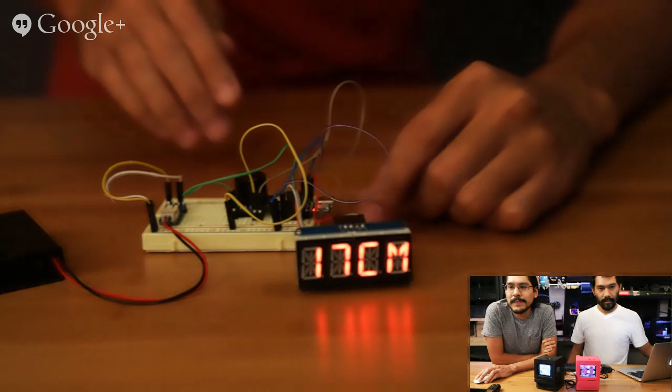This week we're working on some electronics for a future episode. This is a remix of a Trinket project from Mike Barela, done in collaboration with Becky Stern, who helped us debug some of the sensors. It's an EZ4 distance sensor, and it basically writes the distance in centimeters using our alphanumeric LED display. Here we're just testing the distance sensing, and we're going to add this to a very cool enclosure.

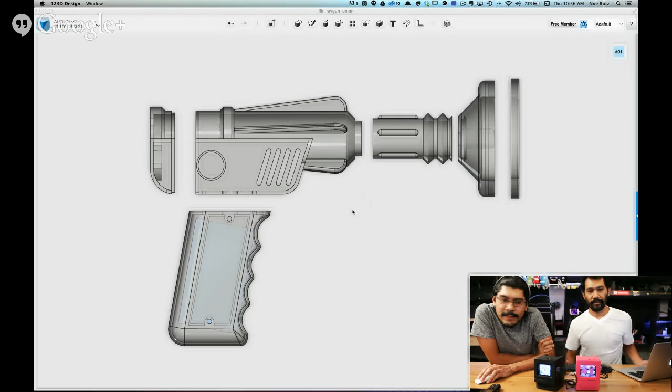This seems to be a good combination of something useful and something really fun. If you guys have seen this before, this is a previous project we worked on, a FLIR ray gun basically. This is one of my favorites that you guys have designed. It's a really nice one. What's cool about this project is we can reuse some of the components and the measurements and start on a different type of enclosure. In this case, I'm going to try something a little bit different.

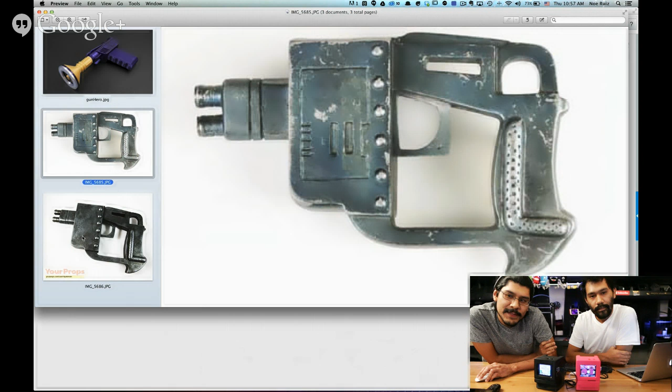If any Dune fans are out there, you might remember this. This is a pistol from Dune, and if you look at the shape, it's the perfect shape for the battery, that giant square thing in the front. It's got that giant nozzle, which is perfect for the barrel, and that's perfect for the distance sensor. It is rather large, so that's sort of what we're going to do. The next step is always to move our circuit off the breadboard, and that's what we're going to do.

Do you think you guys will have time to play around with the sound, the voice element of that, or probably not? We're probably going to stick to just the enclosure and making the little LED display show the right distance. And then that's going to be a lot of fun.

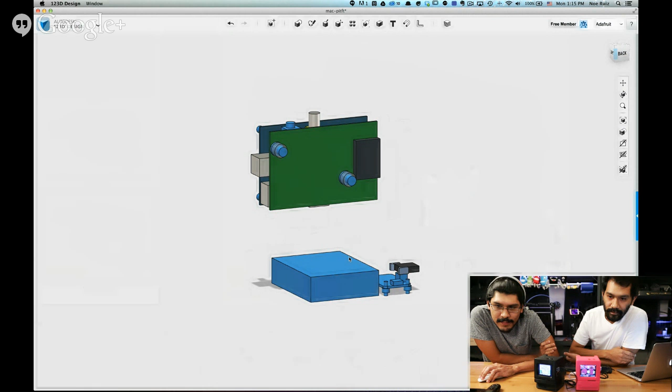Some stuff that Pedro is working on. We have a 49-hour print that just finished, so we're going to do something I don't think I've seen live on the internet before. We're going to pop off a live giant helmet off of a printing plate. Hopefully it doesn't fall apart into millions of pieces.

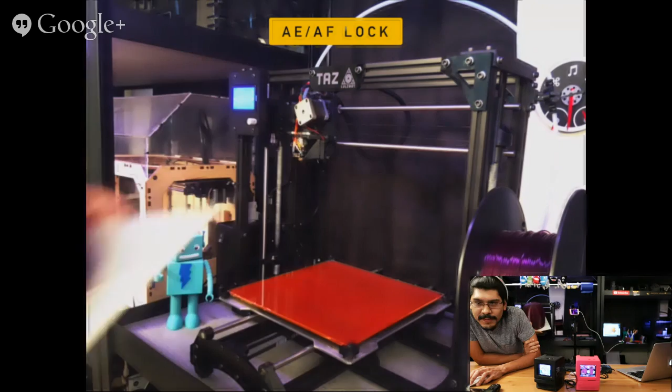All right, so you're popping it off. Whoa, okay, so you're taking the bed off the printer. That's new. Yeah, so we're going to have this in the shop in about a month or so. It's a little flexible plate here, which is great for when you might need a large print.

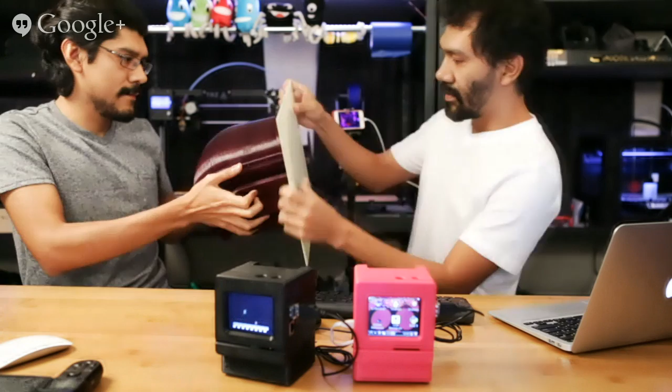You don't need a large amount of sticky tape, or this would be such a pain to get off the print bed by itself. Go ahead and hold that. We'll go ahead and... oh my God, that is so easy. Oh, fantastic! Are there any marks on the bed, or is it totally clean and ready to go?

This is the skirt, but other than that it's good. How much flex does it have? Can you bend it all the way? Pretty cool. This is really flexible, and this is like the fourth helmet we printed on there, so it's maintaining its shape. There's no warp in it, and of course we're using PLA, so there's no heated bed required, but it can go up to like 100C, maybe 110.

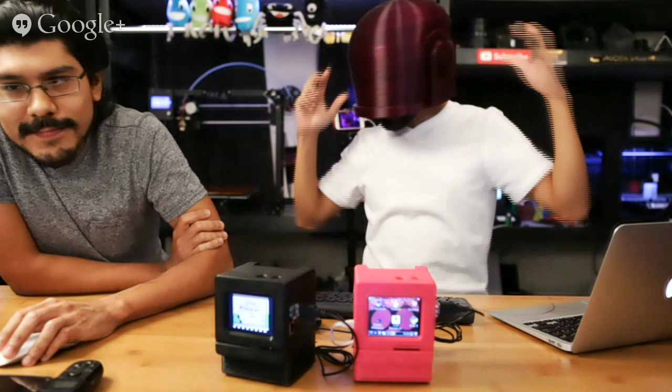We'll have these in the shop really soon, and you'll be seeing this, I think, next week. Next week it's on. That project, I'm already excited to talk about it. I'm trying to bite my tongue.

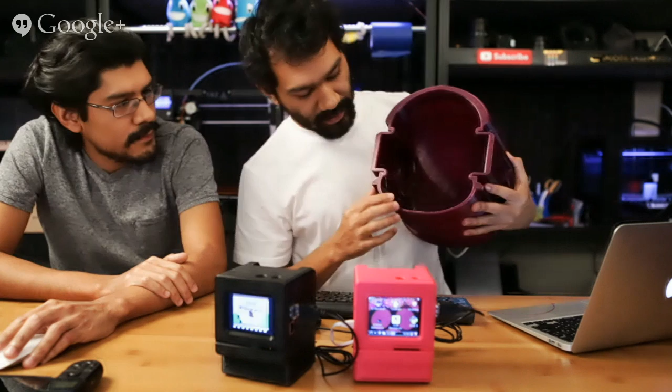So in the bottom of the base of the print, is it nice and smooth? Let's check that out. You have a couple chamfers on the edges so it doesn't scrape you or cut you. Yeah, this is all nicely smoothed out. That's all in the model though.

One of the things that I've been doing for the last day is I just got in the mail my Matter and Form 3D scanner. It's a project that had been a Kickstarter I backed a long time ago. They just finished. I'm very excited because I want to play around with some scanning possibilities.

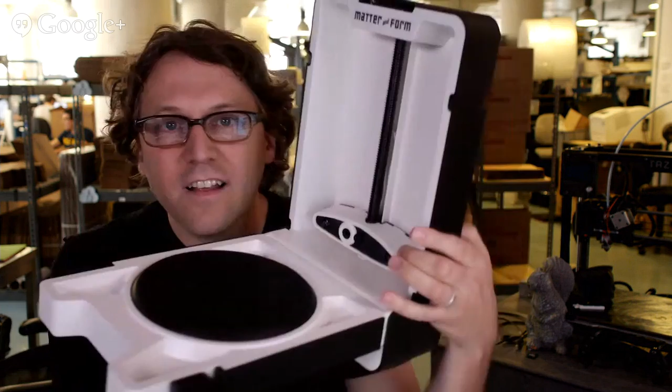So here's this cute... oh cool! It's called a turntable. Yeah, it looks very much like a turntable. It's very light, it packs up very easily. Comes with its little calibration. The case is a design, that's really cool, you can stuff the power supply in it. It's really very portable. So I'm intending to take advantage of it and set it up in a couple of different contexts and see what it's like.

Maybe scan a couple of the pick and place machines and let people download them. Very small parts at a time. This type of scanner is designed for scanning small objects. We've had 3D scanners in the store here before. We had the MakerBot Digitizer, which is a lot bigger and bulkier, and it was an earlier take on how to do this sort of thing. But this one is designed to be more higher resolution for smaller objects, and I'm going to play around with that and see what I can do with things like trying to scan electronics, that kind of thing. Find some speed tips for making enclosures in a very different way than the CAD approaches we've been doing.

Yeah, that's excellent, that's awesome. We're really looking forward to see what we come up with.

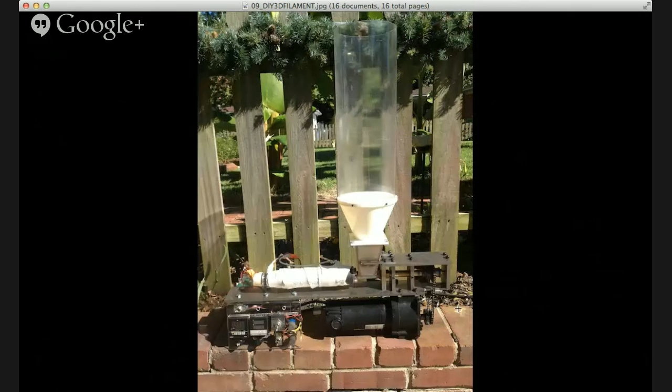This is Russ sharing on the Adafruit forums about his own heavily modded Lyman's filament extruder. Go check out this piece on the Adafruit blog, and you'll be linked to his site where he's done about 15 or so video documentation stages that show a lot of his thinking, his modifications, and some really neat experiments trying to make this practical, including a conclusion video at the end where he's saying, okay, this is sort of working, I'm making filament pretty good, and here's what's next.

Yeah, it's neat to see that people are seeing what we're sharing about and sharing back. Hopefully we'll share some future progress on that project.

Very cool. Yeah, so the project this week will be shared quite shortly, right after this. We've been collecting a couple of these little miniatures and figurines from the Macintosh, Linux, and let's see which one, I think I have both. I have Android and Linux in here.

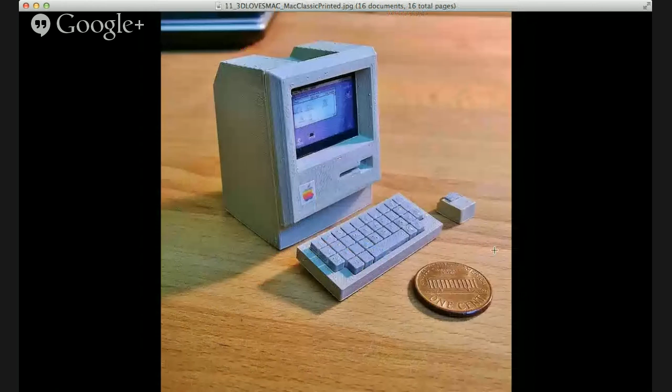So I wanted to highlight this designer who shared, via Robot Engineering, a number of really great miniatures from throughout personal computing and game console history. He did this classic Mac, and also an Apple II, a Commodore 64, an Atari, and an NES. From the very beginning of online repositories like Thingiverse, YouMagine, 3D Warehouse, etc., people would share the stuff they really loved and the stuff that inspired them. So it was fun to share a couple of these neat projects.

Those are so cute. I love how much time was spent on getting all the little details right, the colors and all the little fixtures and shapes. Yeah, it makes it really hard to do miniatures well. It really is.

So go check out the Adafruit blog so you can see some more of the fun things we collected. We shared about Android and also Linux, as well as these fun projects from people loving the classic Macs. So without further ado, I want to get over to you guys and the project you're sharing this week. That's right.

Okay, all right, let's go ahead and debut our little video here. So this week's project is another Raspberry Pi project. This time we're making it into a little Mac Classic mini computer. This project was inspired by John Badger. This time we're using a whole 3D printed enclosure, and we're using the Pi to emulate Mac OS 7, to run sort of old school Mac apps.

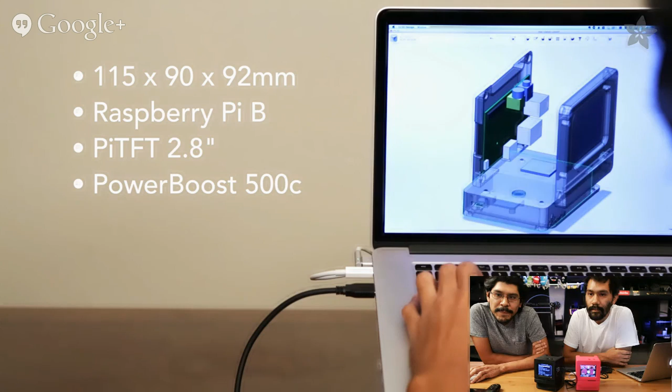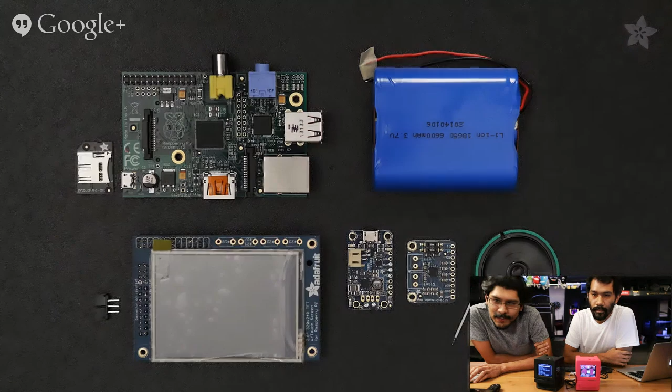The design is a 5-piece enclosure optimized for desktop 3D printing, and probably the only challenging thing is just printing the parts. It's a relatively simple circuit - just the Raspberry Pi, a battery, and a nice little powering circuit we call the PowerBoost 500C, which allows you to recharge the thing. So it's pretty much a little wireless computer.

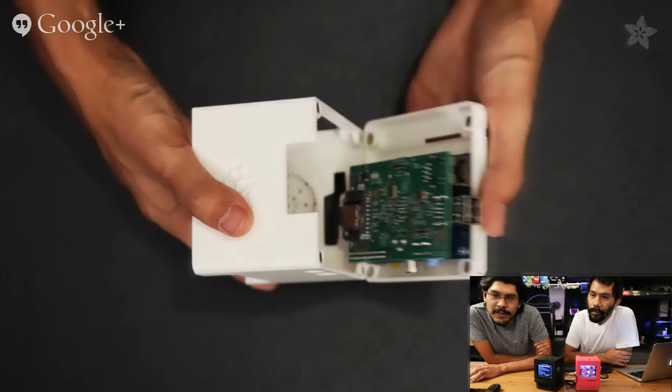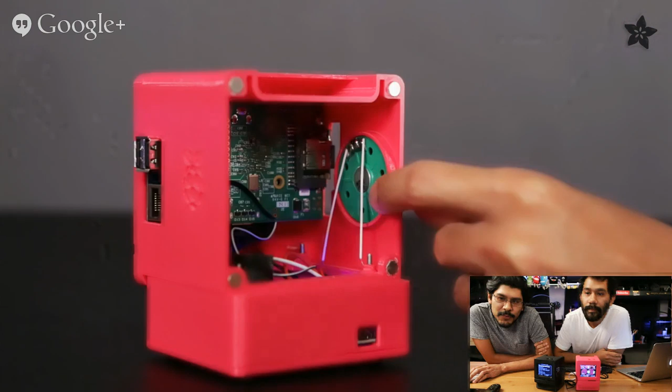We're using magnets and machine screws. Typically we use machine screws, but we want to use magnets so we can get into the electronics. Yeah, there's enough room in there so you can fit a little speaker and an amplifier to get some sound. Now, the emulators probably don't support sound too much, but they're working on it, and it works great as a normal Raspbian computer.

And there we are, sort of booting up into the Mac OS 7. We have all the port openings for you, and the interesting thing about the HDMI is since it was behind the TFT display, we needed a way to get to it. So we're using a panel mount HDMI cable that's secured to the back there. And it makes it really convenient, so you can hook it up to other devices.

And I guess right now I will jump into - it's such a great form factor. I really appreciate that not only do you get to have this thing as a neat tribute to a familiar object, but it's the right size to have there on your desk to run any kind of Pi OS you might want to do. I'm planning on trying a bunch of the other emulator types. Very cool. So let's go ahead and find out.

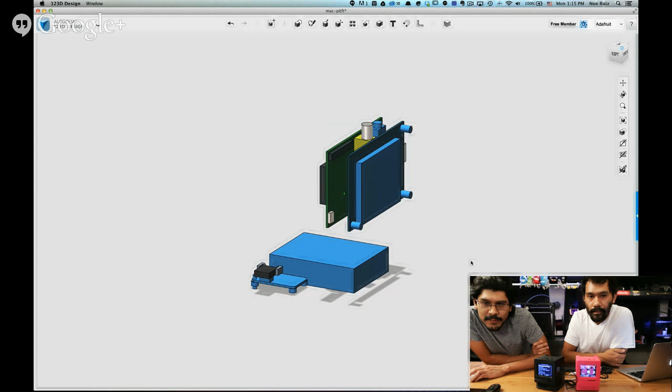The cool thing about this is that since we use 123D a lot, we like to reuse our components to make modeling a lot faster. So if you check out our profile page in 123D, you can get access to all of the components. In this case, we're using the Raspberry Pi, our 2.8 mini touchscreen display, and our PowerBoost.

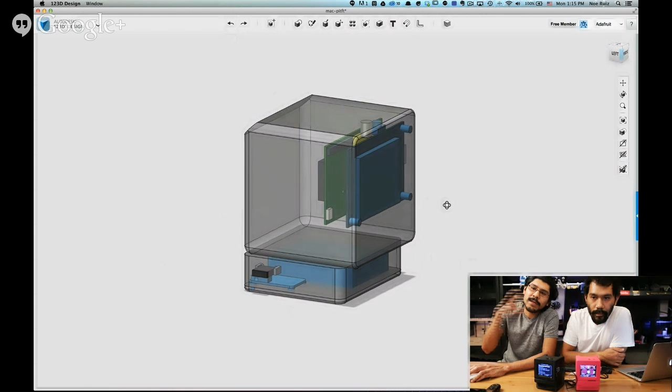Really what I did was import all the components in first, and then just use primitive cubes to mock up how you want things. So I put everything in the right spots that I figured would make sense, and then figured out where the port openings should go and which ports should be open and which should stay closed. In this case I wanted everything open, so you can see all the little ports there.

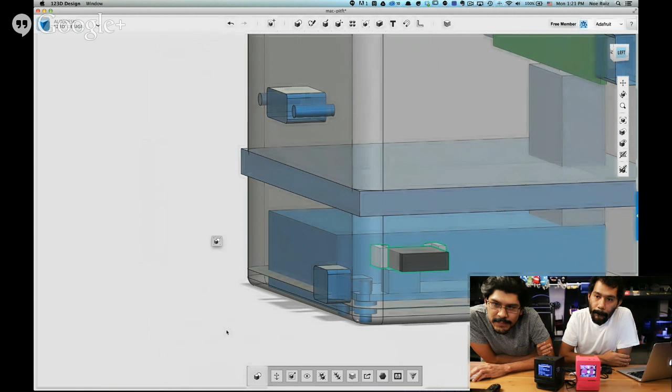This is a little slide switch adapter that goes in the bottom, and right next to that is the power circuit, the PowerBoost 500C, and next to that is the battery. One thing I want to note is before you start separating objects and shelling them out...

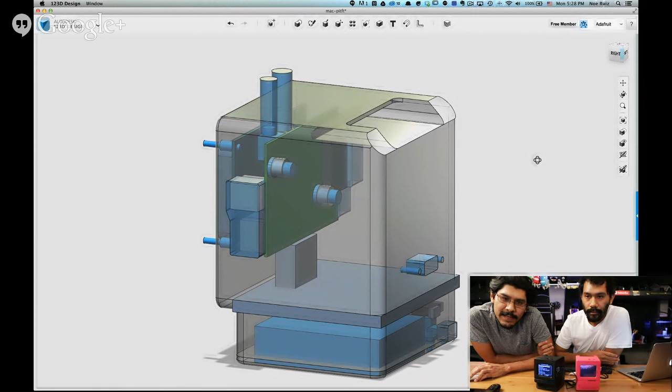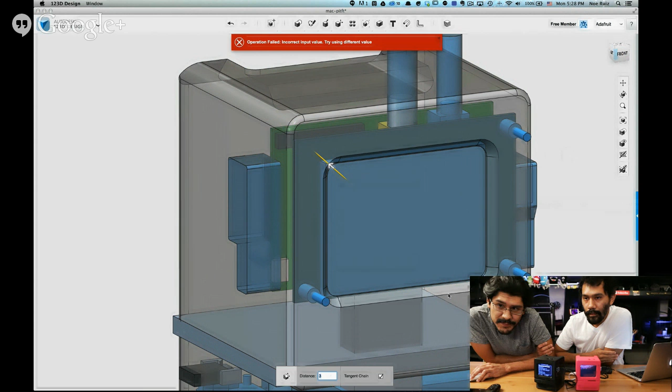It's a good idea to figure out what design features you want. In this case, you saw me cut out that little top iconic feature that's sort of a handle for the Mac, the little top there. I made that before I chamfered it or split it into pieces, because you need to do that first - it's kind of like procedural modeling. And to make the iconic bezel, we just cut a little bit out of it and apply a chamfer on it, which gives it that iconic look from the front bezel.

Next, when you want to split your model, it's really good to use the sketches and the polyline tool - that's basically just a pen tool that lets you draw sketches and shapes. In this case, I just drew a couple there in the right areas that I wanted to split the object. Go up to Modify and go to Split Solid, and then you can change the line sketch that you want to cut.

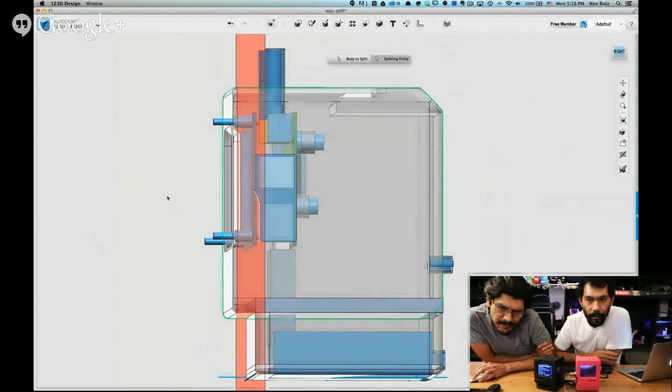And I'm cutting the front here, the front bezel. What I do from there is apply a shell, which is like my favorite feature in 123D, and that lets you create a shell of that solid object. You can just select faces and punch them in and out to make your opening, so that's going to be the opening for the screen.

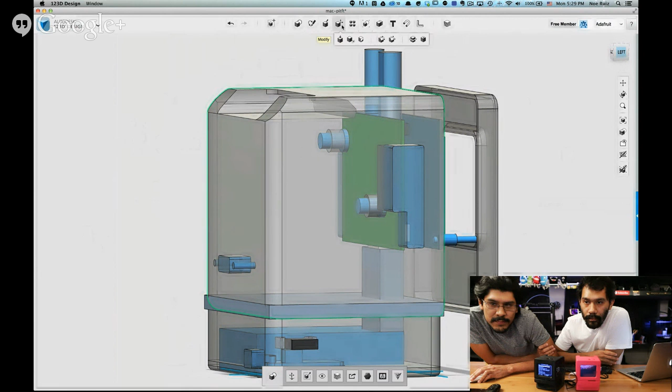And in the back, I'll do the similar thing. This is still a solid object. I'll go up to Modify and select Split Solid. I'll select the line that I want and just split it out like that. Then we'll do the same thing: click on it, select the face we want to shell out, and click the shell button.

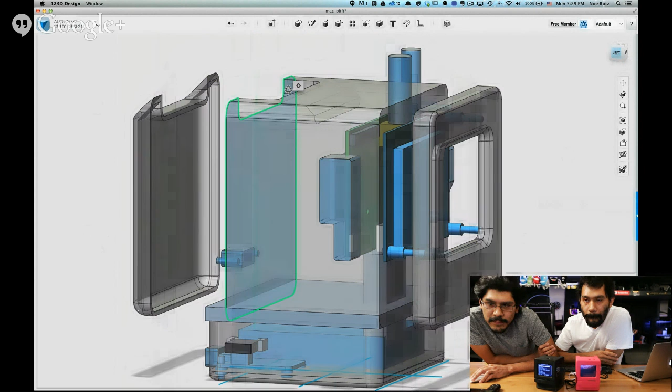A good rule of thumb is to use something more than 1 millimeter. In this case, it's 2. A little bit different is to make a shell of an entire object: you select the top face and the bottom face, and then you shell it that way. That way you can make a completely hollowed out frame, and that's what it looks like.

Look how smart that tool is. It doesn't give you that weird error, and it figures out that the handle's there, that sort of opening, and makes it all nice.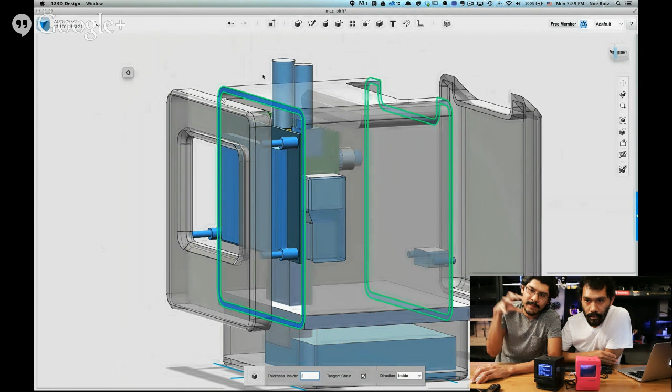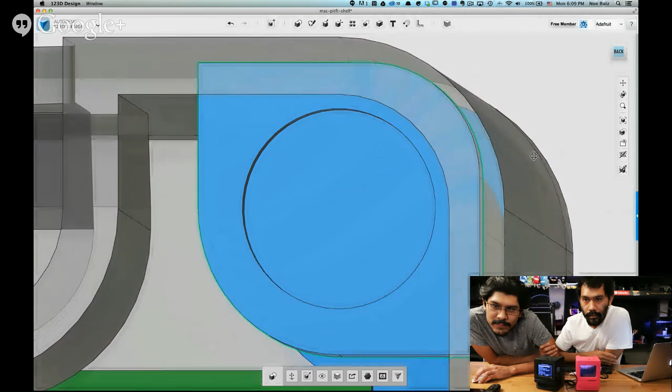The next thing I did was create the standoffs for the magnets and the machine screws. They look a little bit all over the place, but this is what it looks like - they're all on the tip corners. You'll notice none of them obstruct any of the other circuits, and that's really important. You don't want things smashing into each other. It makes this thing kind of boring, it's just a square with the fillet and a cylinder, but that's what it looks like.

One thing I do want to show you how I made is the little speaker widget thing. What's cool about this is that I'm using the rectangle pattern tool, which lets you make an array of objects really easy and interactive.

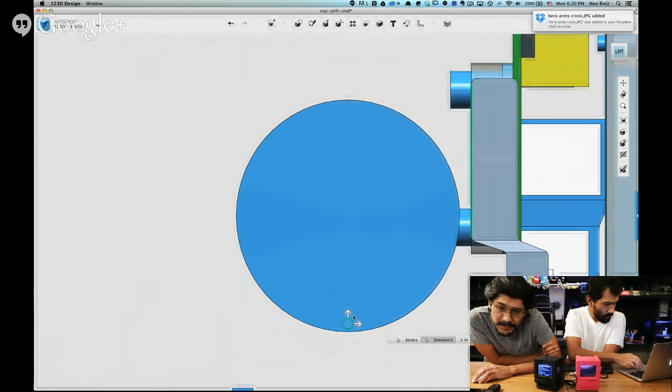So what I did is I added a little cylinder to that little cap that's going to hold the speaker. Using the pattern tool, you can add an array of objects and interact with that little arrow, which is the manipulator, and just enter the value you want. Then you can select it, copy and paste, and rotate it to make that iconic-looking speaker holder thing.

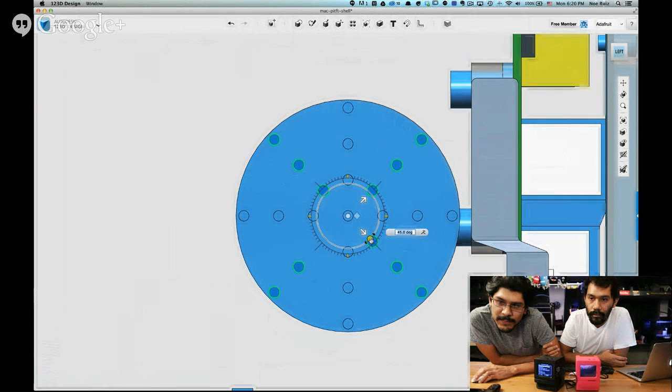Nice. Another cool thing about 123D is that you can merge and combine objects really quick. In this case, I don't have to select each individual thing at once - I can just draw a marquee selection and hit OK, and it does all the hard work for me.

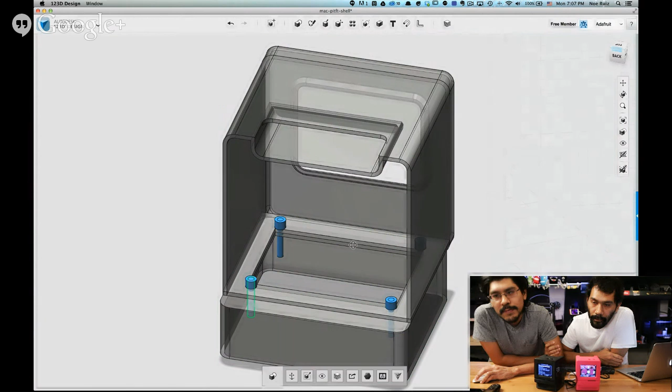For the internals, I really needed a way to get into the base and the main body, so I made a really large opening in both of those parts, and I threw in a chamfer there so I have a little bit more area for the standoffs.

And then merge them, and then I'm using more cylinders to cut out the holes. That's sort of what it looks like there.

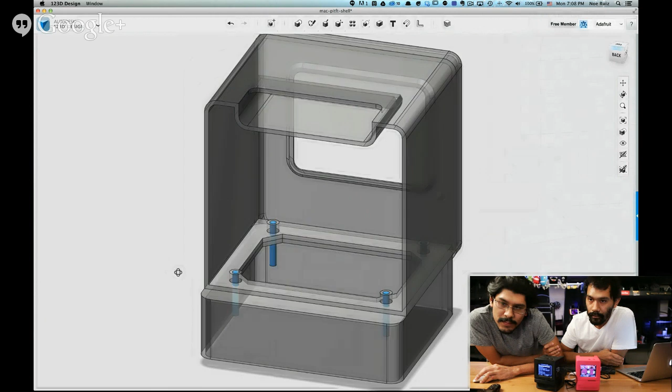So this is a 5-piece design, and one of the things I like to do to these little holes that require the machine screw, you want to add chamfers into it so that the screw head is flush with the surface of the part.

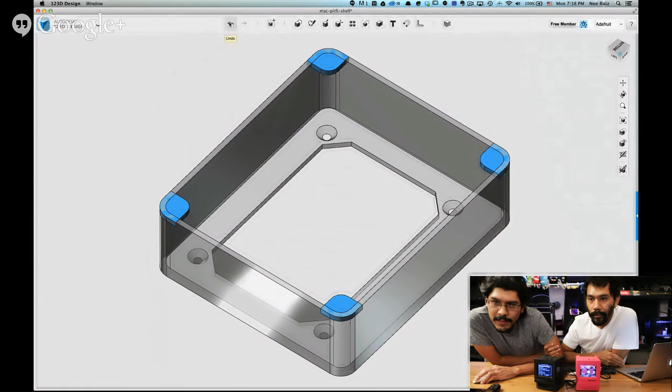Another thing on the bottom base area holding the power circuit is these little standoffs and a little cover so we can close everything up. In this case, I didn't want to use magnets because I don't really need to get in there much, since you can recharge it with the power boost.

So just like other boxy type models, you have standoffs on the edges, and you use cylinders to cut holes out.

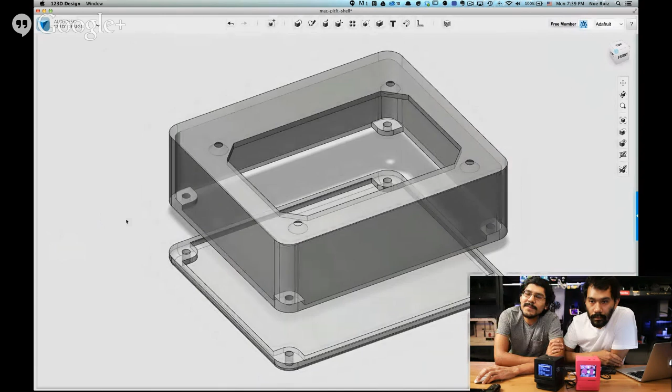So modeling this whole thing is probably like 5 hours, and there's all the parts - looks like an hour a part. It's quite challenging to sort of explain 5 hours in 5 minutes, but hopefully you guys will check out the project on 123D so you can look at all the geometries and see how all the parts fit together.

I find this description really helpful, and one of the things that's interesting to me about it is it's kind of a reverse exploded diagram.

So instead of building out each element feature at a time very slowly, making everything fit together, with 123D you were able to move a little faster, using some handy tools to start slicing and pulling out the parts you need to separate. That way you can make decisions on the fly about how you want to print and produce the object as you keep working into the shape. These are really helpful techniques, and combining that with the hardware, it's clear you're building quite a library of tools we can all use to make enclosures.

Yeah, totally. For this project I didn't have to model any new components because we've already used them in previous projects, so that's always an awesome way to speed things up. I'd really encourage you to check out 123D and the project, and start playing around with shapes on your own to see how you like it. Even if it's just to check out the library and download some parts to use in your own projects, all the measurements are already figured out for you, optimized to 3D print.

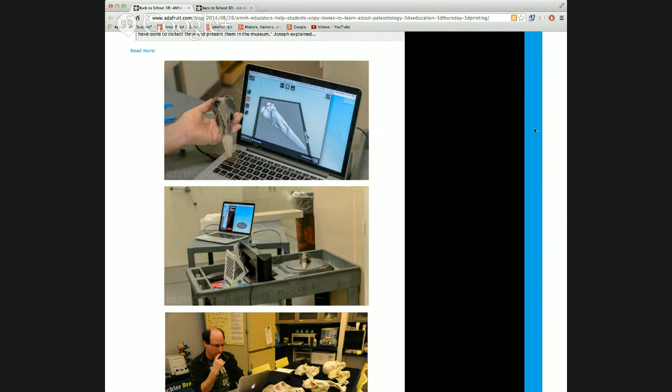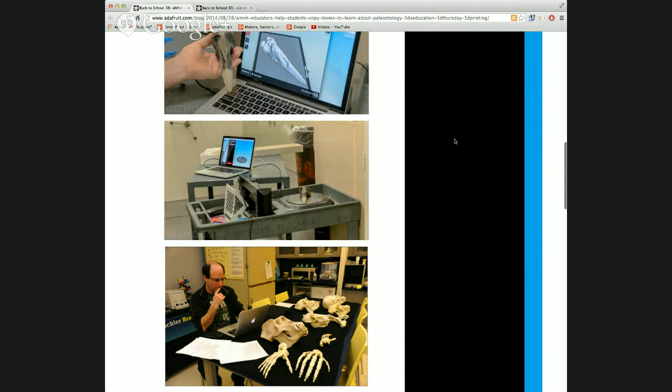Here's the first one - this is Barry Joseph at the American Museum of Natural History. One of the challenges for getting students excited about paleontology is that bones sitting in a box aren't necessarily as exciting as other types of more interactive science. They created a project where students would scan in the bones and print them out, without telling them what dinosaur they might be printing. They had a sense these were precious findings and had the opportunity to put things together and solve puzzles as a group. This meant students who might not have been as excited about paleontology to start got caught up in the puzzle, and were able to get their hands on the resources and test how the bones might fit together, without damaging these very fragile bones. It's like going on a field trip without the trip.

This is so cool. I like that - it's a memento, a thing you can both use as a way to protect something too fragile, and as a physical way to work with and test the shape as an idea.

The last one I'll share right now - there's also Liz Arum, a very talented educator who has been teaching 3D printing in the classroom probably longer than anybody else. Check out her post and her link to her curriculum.

Here's a shout out to mathgrrl, who we mentioned last week - we shared a bit of the curriculum and a neat project she'd done. She did a print-every-day-for-a-year project and just finished it up this past week. So you now have 365 prints to go look at, with context she provides for each one about why it might be interesting, particularly in terms of math and geometry, but definitely in terms of the classroom and ways you might learn from it and share with others.